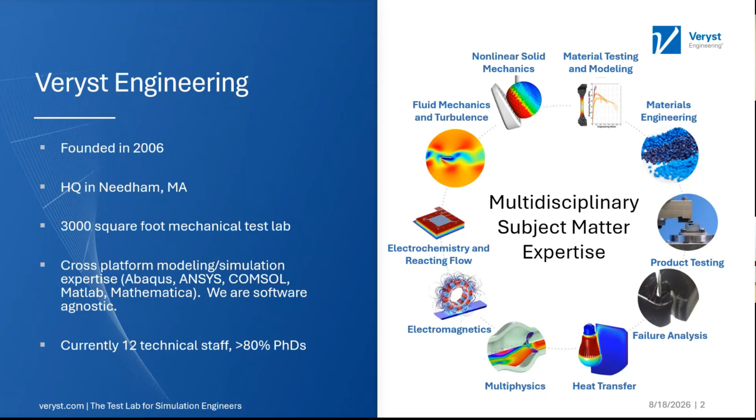We like to say that we're a mechanical test lab built for simulation engineers. We built our in-house mechanical test lab after years of using third-party labs and not being happy with the quality or control we got from them. So as simulation engineers, we developed our lab around that.

That means we don't necessarily always test to a particular ASTM or ISO standard, but we use them to provide guidance to the tests we're running. We target and design our test plan to answer questions specifically related to the simulations and materials you're interested in. That means we test at multiple rates, multiple temperatures.

We'll do multiple loading modes, all sorts of things like that. Oftentimes in the middle of a test plan we might pause and talk to you, our client, to say the test data is coming out differently than we anticipated, so we might want to change this, and we'll have a conversation about that. At the end of the project, we like to deliver simulation engineers the data they need to advance and validate their models.

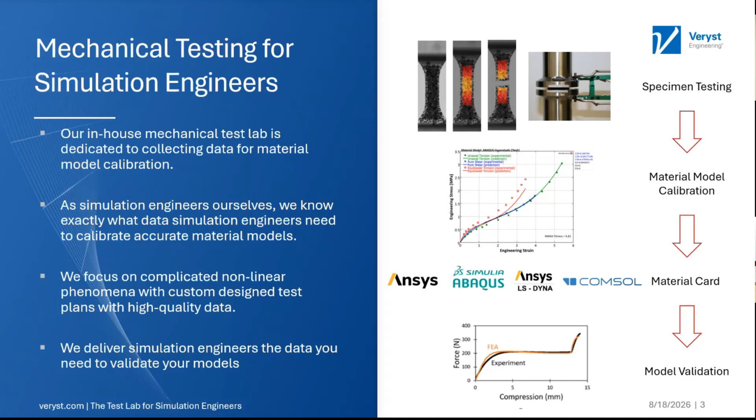Scott? Thanks, Sean.

I just want to give a brief overview of the course before we dive in. This is probably what you saw when you signed up. This webinar is about thermoforming, in two parts: the materials science and materials characterization aspect, as well as the mechanical characterization required to create FEA models for thermoforming processes.

We're going to do a brief overview of the structure of polymer materials, in terms of the different aspects of their structure that can drive performance related to thermoforming processes. We'll work on understanding the workflow for designing test programs for thermoforming materials, as well as the actual steps needed to create an FEA simulation of a thermoforming process.

More specific topics, we divide this into two parts. My background being more in the material science and polymer science side, I'll go first to talk about the material science aspects of polymers. We'll talk about crystalline, semi-crystalline, and fully amorphous polymers, as well as glass transition temperature and other temperature-dependent properties particularly germane to thermoforming applications. We'll talk about two material characterization techniques, DMA or dynamic mechanical analysis, as well as differential scanning calorimetry, or DSC. Then we'll switch over to Sean, who will talk more broadly about thermomechanical characterization, material model calibration, and FEA of thermoforming processes.

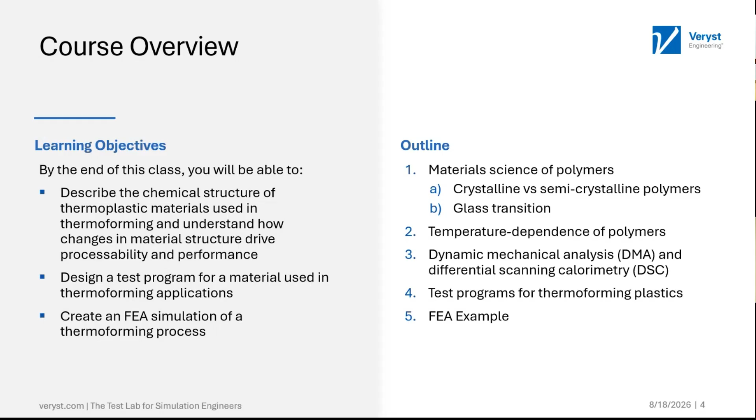As I'm sure everyone here is aware, blow molding and thermoforming are two very closely related methods in terms of their intrinsic mechanical and thermomechanical underpinnings, used pretty widely across many industries, where you take a piece of thermoplastic material, heat it up and stretch it, using compressed air, vacuum, or a physical tool, to make a relatively complex shape.

The key driver in thermoforming applications is that the cost of designing and fabricating a new tool is quite intensive, and very sensitive to mistakes.

So there are only... you kind of get locked in on a tool design. And if you find out later that something needs to be changed in the tool, that can be quite costly.

So the idea is that if we can use FE models with advanced material models to simulate the thermoforming process before we actually cut the tool, we can reduce the number of tools that need to be made. You can get it right even on the first try, which accelerates the development process, taking a new product from a sketch on paper or a CAD model into something that can actually be formed into a real product.

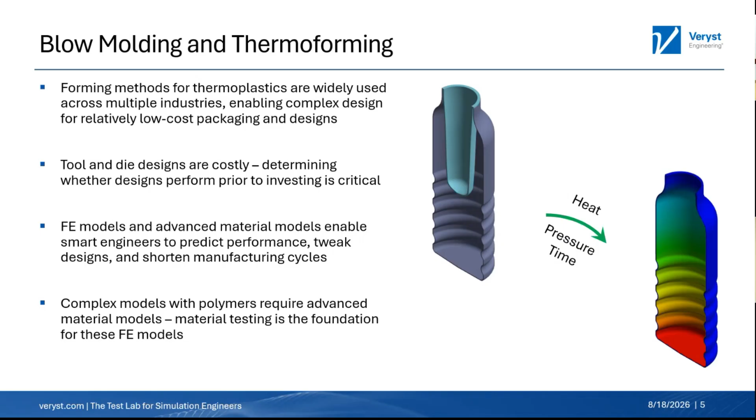And these thermoforming processes - we'll be using thermoforming essentially as a catch-all for these different aspects or different ways of forming thermoplastic polymers.

I find it very interesting personally, because what we're doing is heating the material up until it's soft, but not totally liquid. It's different from melt processing that you can do with other thermoplastics. So you have this mostly liquid but semi-solid material. The key point is that if we understand the polymer phase transitions that control the thermomechanical properties of these materials, we need to understand those to understand the different process conditions and variables that affect the thermoforming process.

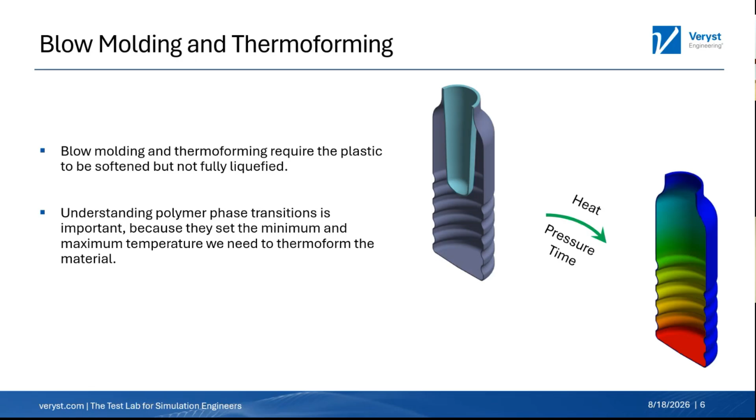There's not a lot of local order to the polymer chains, in contrast to other engineering materials like metals, where there's a very specific crystal structure. The atoms are in very specific repeating spots that give rise to the interesting properties of metals and things like that.

But the key distinction is that all polymers contain amorphous regions, but only some polymers contain crystalline domains. So that's why we call them semi-crystalline polymers, because they have both amorphous and crystalline domains.

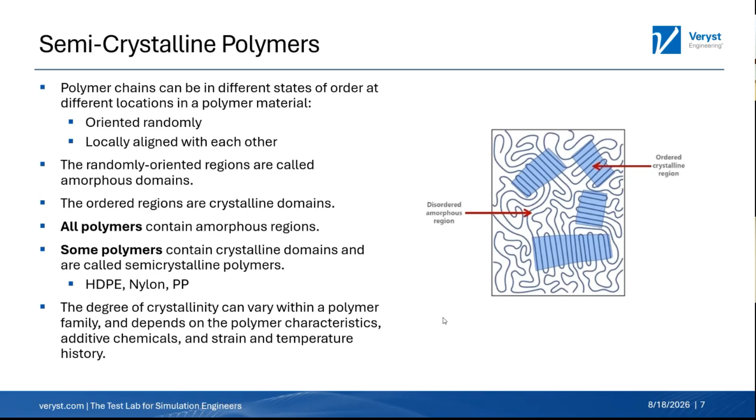More relevant for our discussion today about thermoforming materials is that both fully amorphous and semi-crystalline materials are commonly used in different thermoforming applications. Things like ABS and polystyrene, which are very commonly thermoformed, are fully amorphous polymers. There's no crystallinity there - it's not part of the intrinsic structure of the material.

On the other hand, polyethylene, or HDPE, which is extremely commonly thermoformed or blow molded, is essentially always semi-crystalline. So you do have to consider the interplay between the amorphous and crystalline domains when thinking about the structure of the material and how you analyze it.

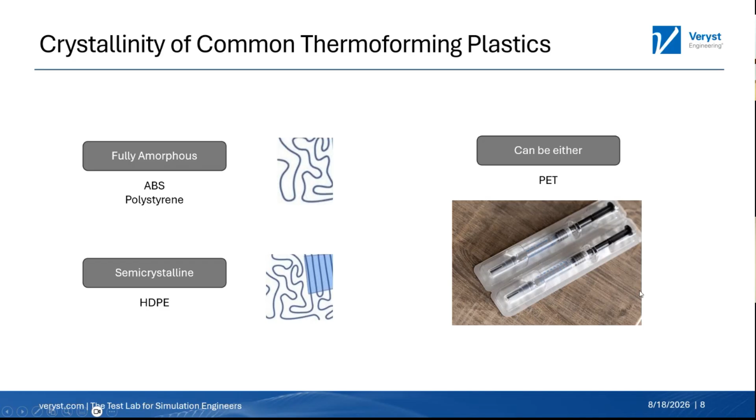So understanding the potential for forming those crystalline domains - which, if you do form them, will cause the material to become opaque instead of clear - could be a critical failure mode of your packaging, because if you can't see what's inside, the consumer's not going to like it. That's a real failure mode that needs to be considered.

So we're going to talk a little bit about the glass transition here. This is something anyone who engineers a product with plastics or polymers needs to understand. I talk about this in lots of the different webinars we give here, because I think it's maybe one of the more important concepts in polymer science.

The difference between melting and a glass transition is, if you're trying to impress your friends at parties, you call it a second order phase transition instead of a first order phase transition, which melting is. But it affects how we actually measure where this temperature is.

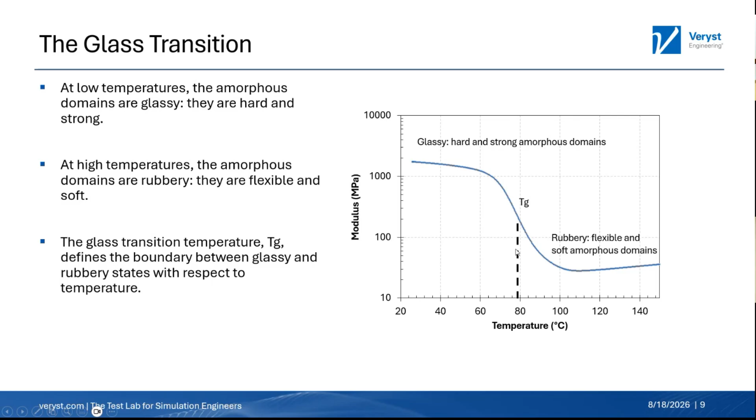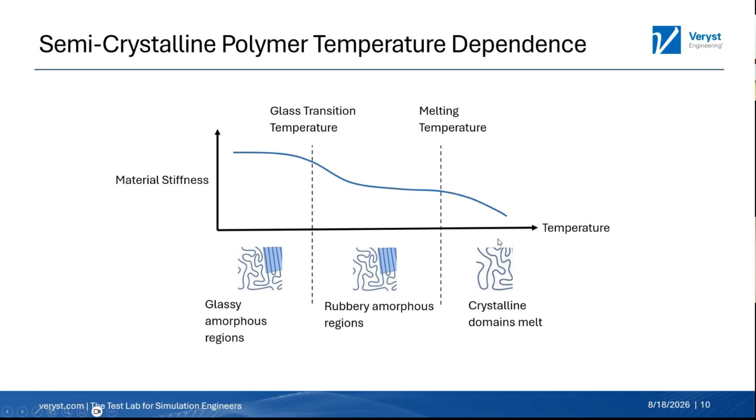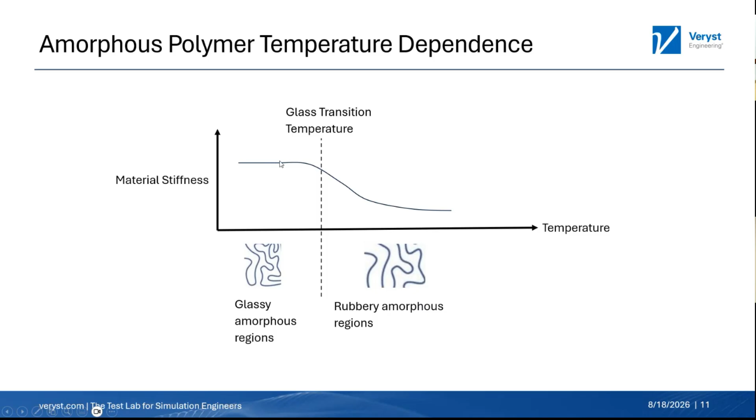In contrast, for amorphous polymers, this diagram looks a little simpler because there's really only one transition. As we go through TG, we go from glassy amorphous domains to rubbery amorphous domains - from a harder material into this softer, more rubbery material.

Tools you can use to measure the thermal properties of these polymers relevant to thermoforming - the one I like to talk about first and most is dynamic mechanical analysis, or DMA. This is a measurement tool that, even if you're not looking at a thermoforming polymer, I strongly recommend getting a DMA temperature sweep done on essentially any plastic you're using in your device, because it reveals lots of useful information we're going to talk about in more detail.

Fundamentally, the DMA is a mechanical test. We have a sample, shown in black here, that's in a tension grip. There are other grips that you can use.

And then this hood here, which is sort of an oven, comes down. It's a forced convection oven.

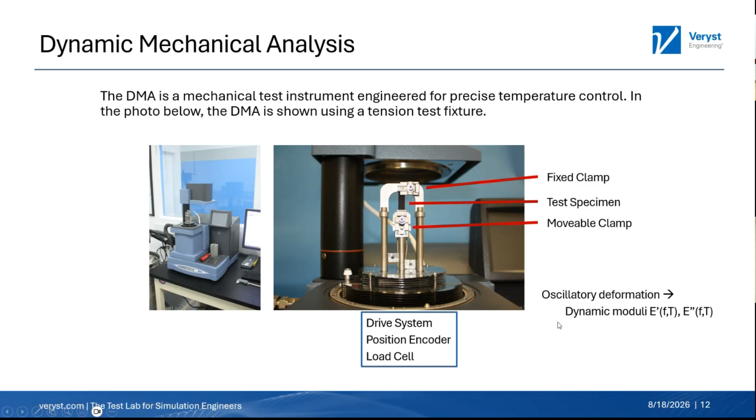What we're going to talk about today is a way of measuring the dynamic modulus, or complex modulus, of the material, storage modulus, and loss modulus as a function of frequency and temperature. We're not going to talk too much about the other ways we can use a DMA. Today we're mostly going to talk about a temperature sweep, which is a type of test where you're measuring the storage modulus, essentially the elastic modulus of the material, and the loss modulus, or E double prime, as a function of temperature.

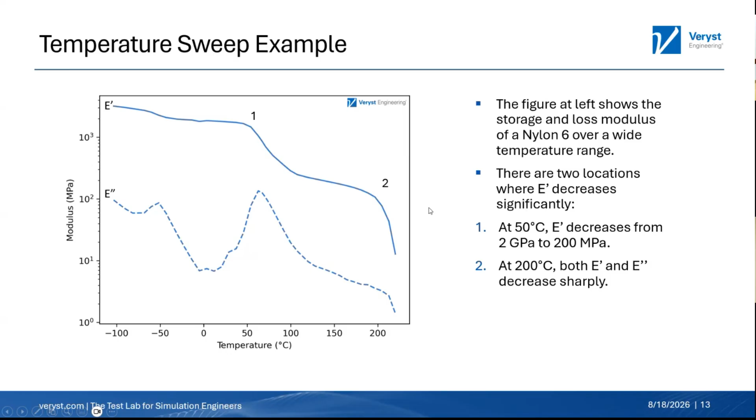This particular example is for nylon 6, which is a semi-crystalline material. As we go from minus 100 C up to just above 200 C, I've pointed out two spots that are most interesting: one labeled number 1 and one labeled number 2, both where the storage modulus, essentially the elastic modulus, decreases sharply. At point number 1, we have the strong decrease in the storage modulus and this local maximum in the loss modulus.

That's characteristic of the glass transition of materials. Most nylons have glass transition temperatures in the 50 to 60 C range, give or take. You can see this happen over the course of heating up the nylon.

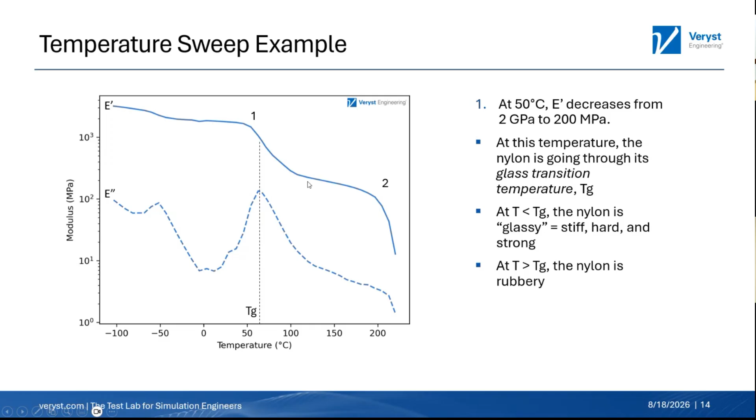At point number 2, this is the melting point for that nylon. As I said, nylon is semi-crystalline, so this is where we're measuring the onset of melting for these materials.

We can use the DMA to not just measure these characteristic temperatures, the melting point and the glass transition temperature, but as an engineering exercise, it's very useful to think about how the stiffness of your material changes with temperature, to help assess the risks of various failure modes or excess deformations across different temperatures, versus in shipping versus storage and things like that.

If you're using a polymer or plastic in your product, I couldn't recommend it more strongly, just getting this data. It's just small strains, doesn't account for many other things your products will see, but it's a lot of information from one single test. This is my strongest recommendation for using the DMA.

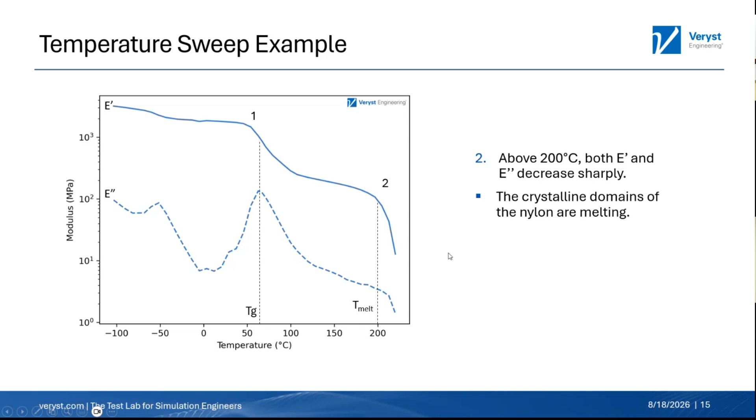I'm going to transition a bit to talk about a different technique we can use to measure the structure of thermoplastics, things like the glass transition temperature, the melting point, as well as the crystallinity—essentially the specific degree percentage of the material that is crystalline. This is differential scanning calorimetry. I'll spend a bit more time on this because I find it to be a more counterintuitive or less straightforward technique to grasp.

Fundamentally it's a thermal analysis technique—it's calorimetry. What we're doing is we have essentially two crucibles, one that has your sample in it and one that's just empty. The DSC, the tool itself, is programmed to heat both of these crucibles at the exact same rate. Typical rates are between 1 and 20 degrees Celsius per minute.

That's just a baseline to compare to. There are other methods that use extremely high heating and cooling rates, but that's the standard for these. One thing to note is that we're usually using only about 5 to 10 milligrams of sample.

One of the real advantages of DSC is that you do not need very much material. You can take an extract from a product that comes off a tool, comes out of the field, without having to worry about creating a nice mechanical test sample like you do with the DMA.

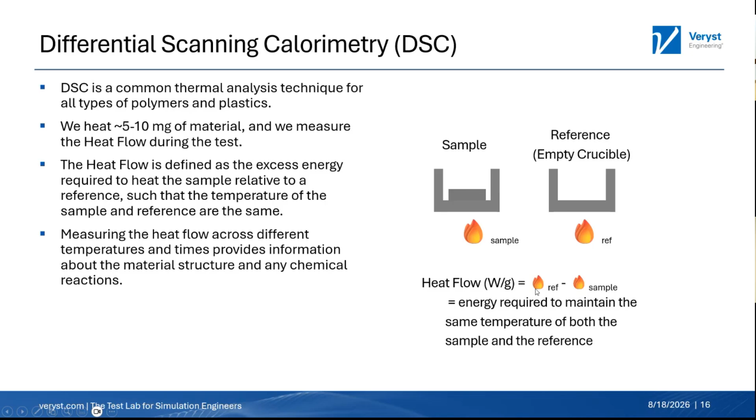What we're actually measuring is the amount of energy required to maintain that heating rate in the sample relative to the reference. If you take the difference between the heat flow for the sample and the reference, that is the actual output of the DSC. Using that curve, that heat flow versus temperature curve, which is the specific result of the DSC, we can actually measure Tg, the melting point, and the percent crystallinity.

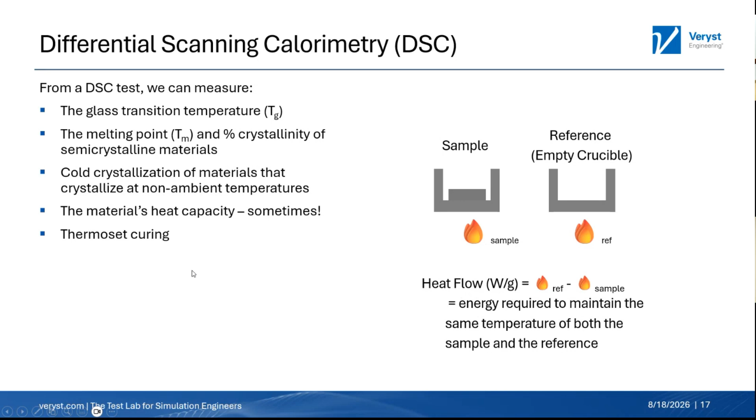We can look at something called cold crystallization, which is especially relevant for PET. We're going to talk about that in a little bit more detail. You can also measure things that are perhaps not quite relevant to thermoforming applications, like the material's heat capacity, and you can even measure chemical reactions like curing of thermosets. Those are more advanced methods you can use a DSC for.

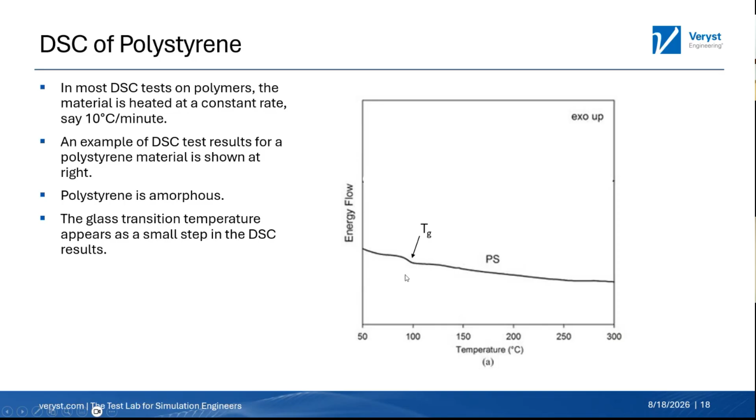So what's happening here is, to take one step back, that clear PET most commonly used for thermoforming applications—because it's clear, you can see through it, it makes a nice packaging material—is processed so that it's fully amorphous. Even though PET intrinsically wants to form crystalline domains, if you quench it, cool it really fast from a melt processing step, you can prevent the nucleation and growth of those crystalline domains and maintain that clarity. So what happens is we heat the PET up, it goes through TG, and it becomes much softer.

As we add enough thermal energy to the system, the polymer chains are able to move around much faster. When they can move faster, they can find the orientation where they form those crystalline domains, and you measure that as an exotherm in the DSC trace—it actually releases heat. So basically, as we heat this up, we're allowing the kinetics of that phase transformation to be fast enough that it happens on a relevant experimental timescale.

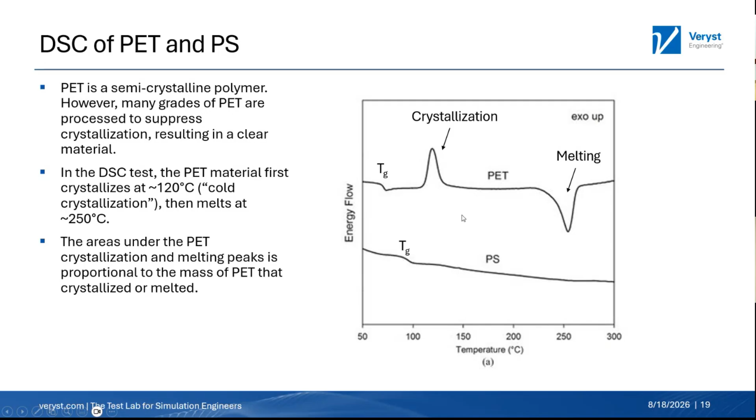Now, as we keep heating the PET up, we reach the melting point, and all of those crystalline domains melt. If you take the area under these curves, you can use that to calculate the degree of crystallinity in your PET material.

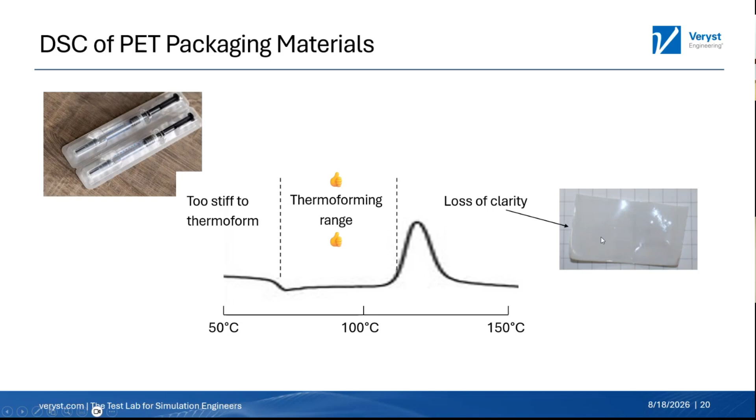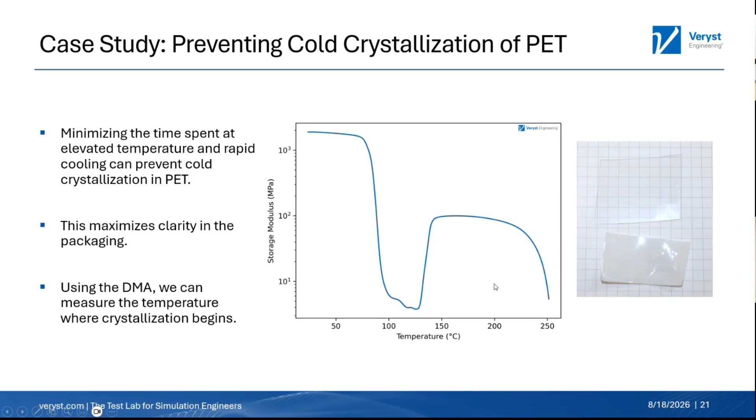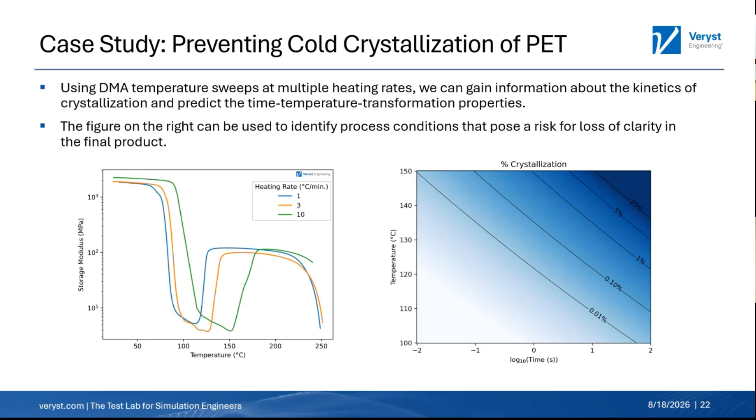And so with that, I think I'll hand things over to Sean, who's going to talk a little bit more about the FEA modeling side of things. Thank you very much, Scott.

So I'm going to go through a case study on how we would do testing and modeling of materials if you're going to simulate a thermoforming type process, using an example of blow molding. In this case, we're looking at a PET material, a thermoplastic material often used in plastic water bottles or soda bottles.

We've done this specifically at those temperatures because we've done some of the tests that Scott has been talking about, some DMA, some DSC, to understand how the material changes at those temperatures. This is in the processing range that we're interested in for this material.

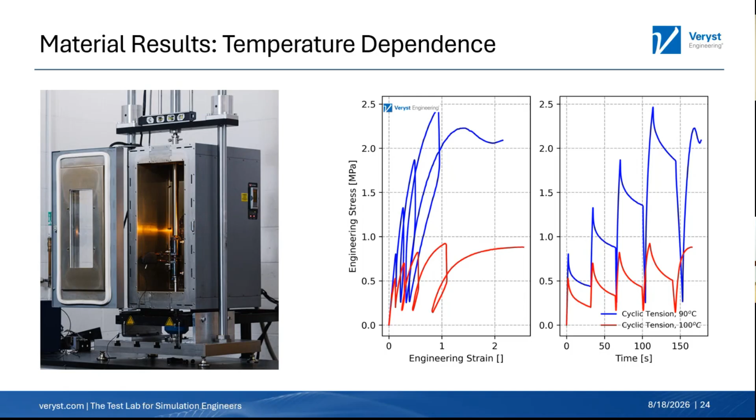So we see this temperature dependence, and at the temperature that we're interested at, because we're near one of those transition temperatures that Scott was talking about, we're getting a very different material response when we look at the temperature. Similarly, although we haven't really discussed it today, time and temperature are related in polymers.

So we also see a lot of rate dependence at this rate, where we might not expect to see this much rate dependence, a 50 to 60% increase in the peak stress with an order of magnitude change in the strain rate. We might not expect to see that unless we're at one of these transition temperatures that Scott was just talking about.

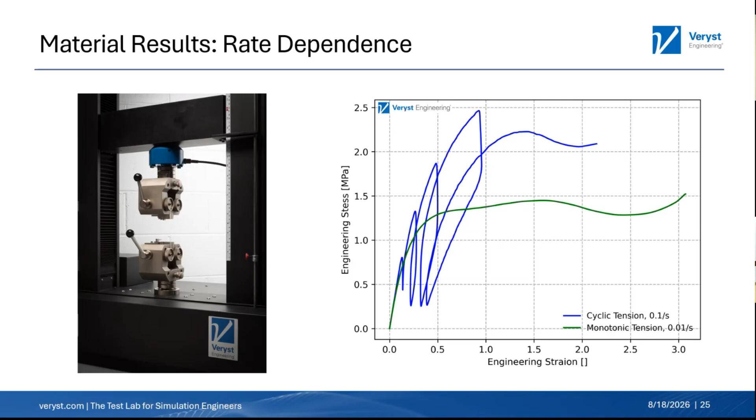So what we do in this test is we apply a speckle pattern. So there you can see that we've taken the clear material, we put a base coating of silver ink on there, and then we put a bunch of black dots on there. So that random stochastic pattern is just there for us to track it.

And we take hundreds to thousands of images during the test, and then we post-process it in a very similar way that finite elements are post-processed. And then we can measure the strain in a non-contact way.

And this can be a great tool because the strain measurement does not impact the strain that we're measuring. It doesn't add any force to the system. We can do it at high temperatures, low temperature, room temperature, very fast rates, very slow rates. And then it can also let us look and see if there's any sort of non-uniformity in the test.

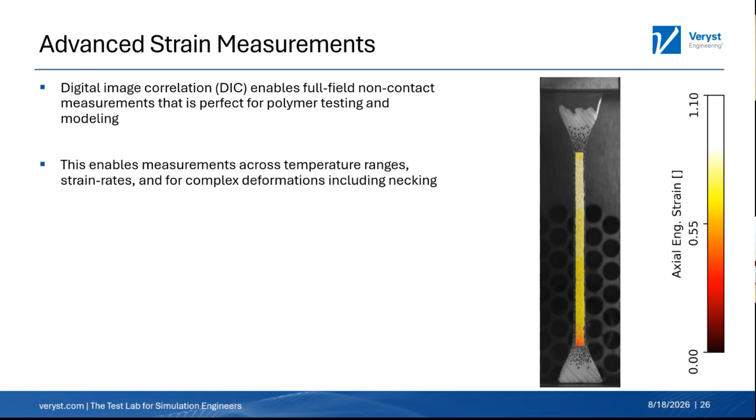So we do this for the majority of the tests we do here at Veryst Engineering. We use commercial software to do this, and it helps us get accurate data at all sorts of conditions using the same method. And so we find it to be a very powerful tool for selecting material models and getting data on polymers.

So I talked a little bit about the test data that we have. So what I did in the next step here, and if you remember back to a slide at the beginning, we talked about that process where we do testing, then material modeling, then finite element simulation. This is the material model we calibrated to this test data.

This is called the Bergstrom-Boyce model. One reason I like it is that it's an advanced model that captures elastomer-like response very well. I call it a nonlinear viscoplastic model. Some people call it a nonlinear viscoelastic model. We could have debates about that all day. I'd be happy to do that with you over a coffee or a beer.

But the other reason I like it is that it's available in all modern finite element code. So you can find a version of this in Abaqus and ANSYS and LS-DYNA and COMSOL and Radioss and in Marc. And I'm sure there are others I'm leaving off there, but it's been around for a while and it's been implemented, because it is such a powerful model.

So when we calibrate it, we have 7 parameters that we need, and I've shown the structure of the model there over at the left, and I've color-coded it to help us understand what's going on here. So in this model, we have 2 parallel springs shown by the green and the blue squiggles, and we're going to call each one of those legs a network A and a network B.

The stress in network A is given by that blue equation, which if you have seen this before, that's the Arruda-Boyce or 8-chain hyperelastic model. So that's a non-linear, completely elastic model. And we can see that there are 3 parameters there. There's a bulk modulus kappa, there's a shear modulus mu, and then there's a lambda L, which is a locking chain stretch.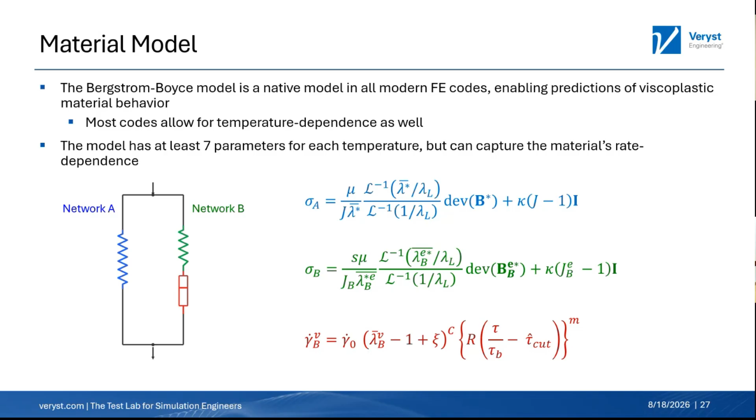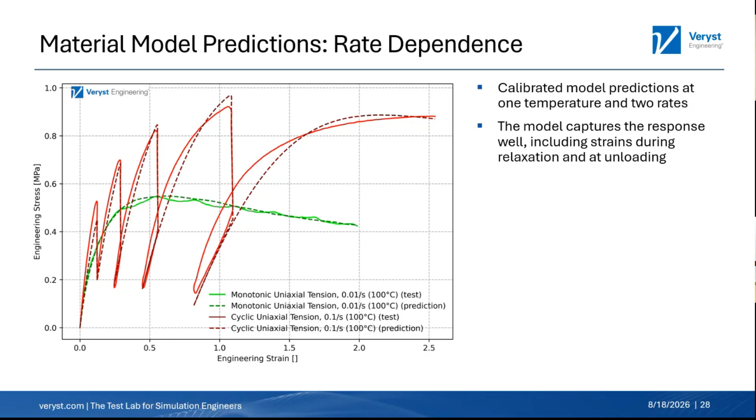We could do a little bit better in capturing the hysteresis - that's when we do that unloading, say on that red curve at about 100% strain. When we unload, we don't exactly follow the loading path back up. That's some hysteresis. We're not quite capturing that, but overall I'm very happy with this model. We're capturing that large strain response, the rate-dependent response, and we're doing it accurately here. This is a well-calibrated model.

But overall we're capturing that trend and that response very well. So we're going to get the rate dependence where we see a material that's stiffer as we pull it faster and faster. We're going to get the stress relaxation effects, which means we're also going to get things like creep. So we're capturing this model response well.

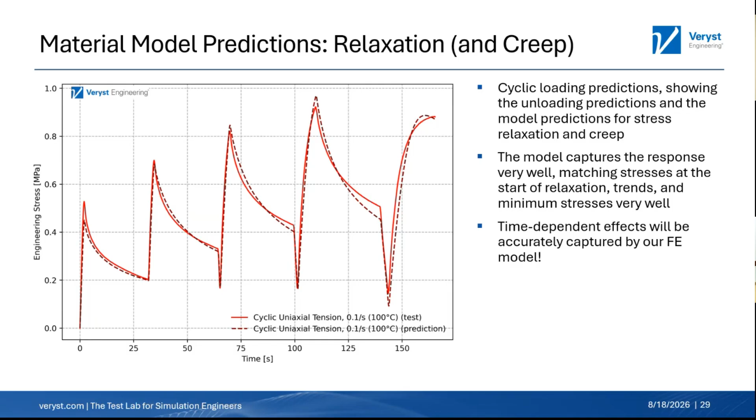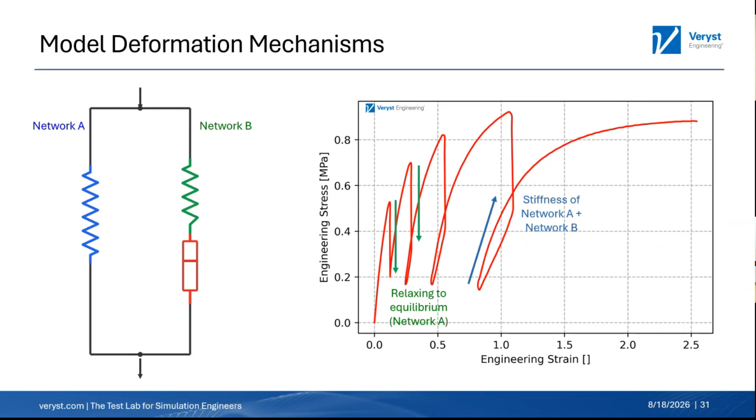So that's a little bit of a primer on the Bergstrom-Boyce model, which you can use in all major finite element codes. But now I want to talk about the simulation we're running, and how we're going to use this model to really help understand thermoforming or blow molding, to help you design your process well.

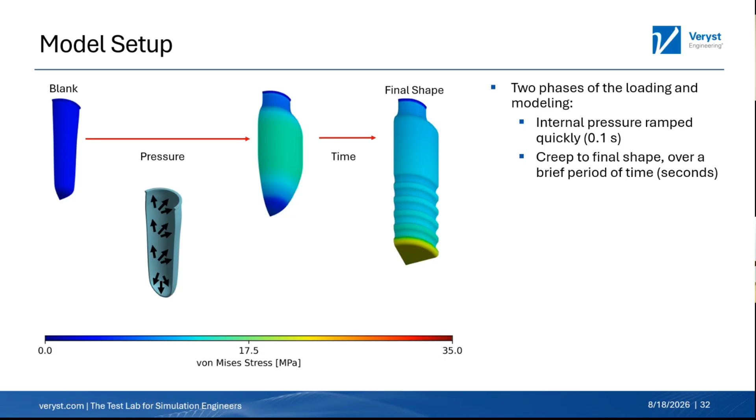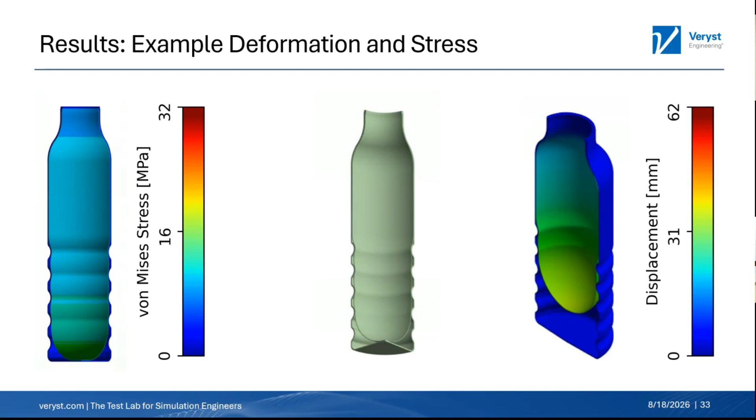But if we look at the 90°C one, at that same pressure and at that same time, you can see that we've only expanded the blank a little bit. And this is intuitive to us - we know that these materials are much stiffer as they're getting colder and colder, or closer and closer to room temperature. But look at how much of a difference that is. That's the difference between, on the left, your process working, and on the right, your process is not going to work, and you're not going to get a bottle at the end of the day.

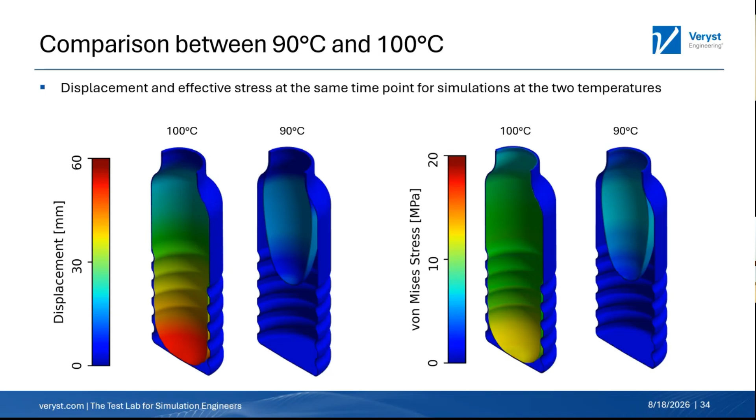Is that labeled backwards? Excuse me. There we go.

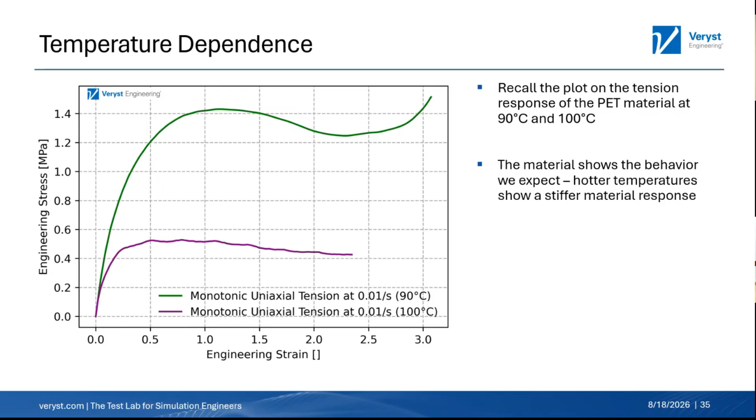What we're going to see is that as we go to higher temperatures, we might not always get the trend that we expect. So here at 90C, we have a stiffer material. At 100C, it drops pretty significantly, a factor of 2 or 3. And then you'd expect the same thing to happen at 110C.

That's because the PET is showing cold crystallization, so we're getting a change in structure due to that heat. As that happens, we're getting a stronger, stiffer, and ultimately more brittle material, and that's going to make our simulation process much more difficult.

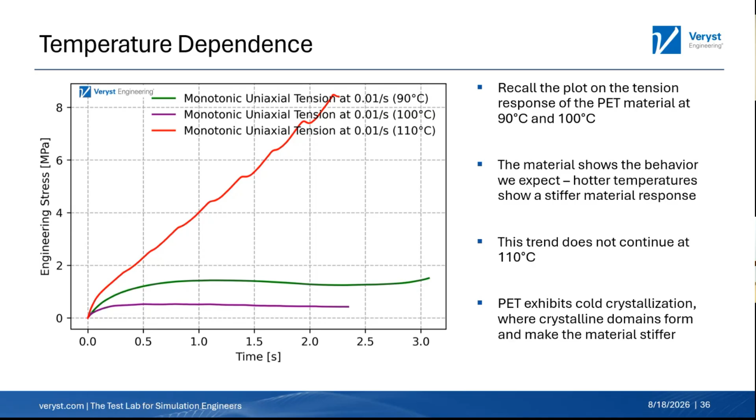I think that is about it. So we've got about 15 minutes left for class.